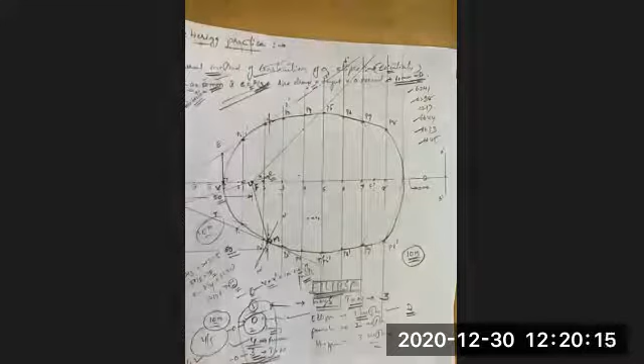So in last class, we discussed about ellipse. Any doubts in this regard? What probability I explained? I told that maximum probability is he may change the values. What values he can do? In last class, I taken focus to distance 50 mm, eccentricity 2 by 3, right? Now he may change, instead of 50, he may make it 60. Instead of 2 by 3, he will make 3 by 4.

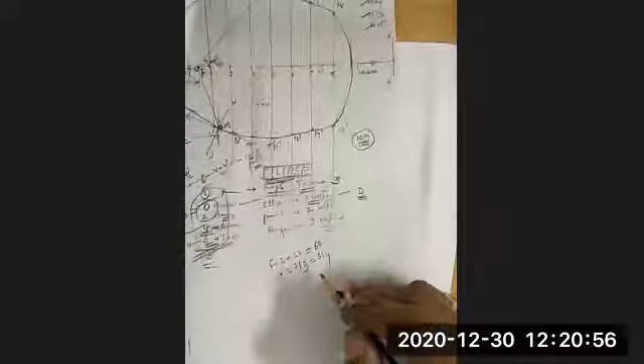Next. Only probability is he may change the value of focus and distance. So he can change any value. You can draw figures. That's why I told I will solve only one problem. If you want more practice, take 60, change eccentricity value, do it. You can make it 3 by 5. So there are so many probabilities. Only thing is that size is a matter. Principle will remain same. This is the one aspect with respect to nature of curve. Second, what I told, it is less than 1.

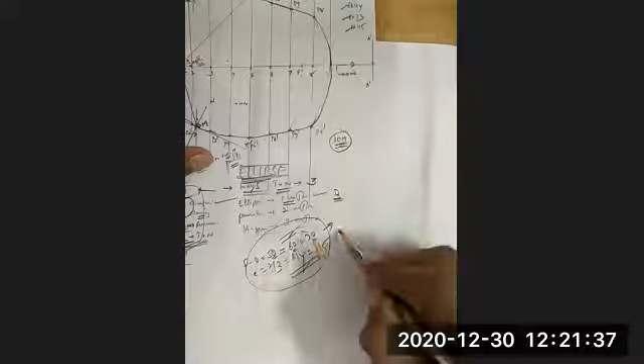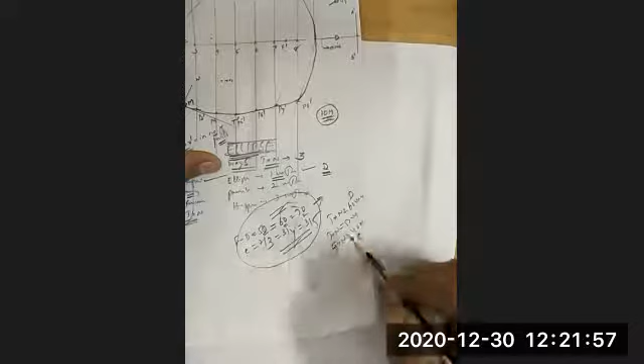See carefully. Next, he may ask tangent and normal. In first method, I asked some 60 mm. He may say that tangent and normal should be from directrix. I am talking with respect to directrix only. He may say 50 mm, he may say 40 mm, it may be 70 mm. So values may change, but the procedure which we adopted will remain same. Procedure does not change. Any doubts? Drawing tangent and normal, you say again? Yeah.

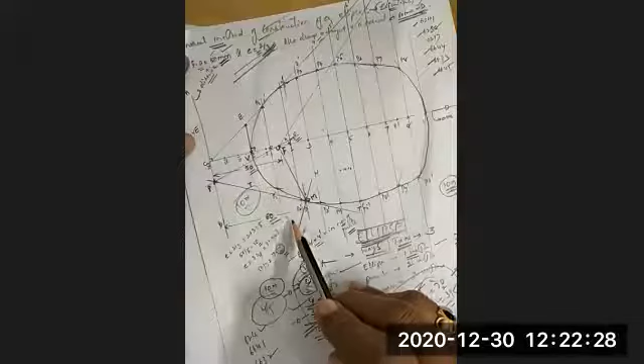In directrix method, I simply told directrix is a fixed line. From fixed line, as per given condition, it is 60 mm. I drawn one more parallel line at 60. That line I extended in such a way that it has to cut the arc. And that is cutting arc in two positions, up as well as down, because it is a mirror image. So I preferred bottom. Wherever it cuts, I taken M, the point at a distance of 60 mm from directrix. After that, I joined that point with focus.

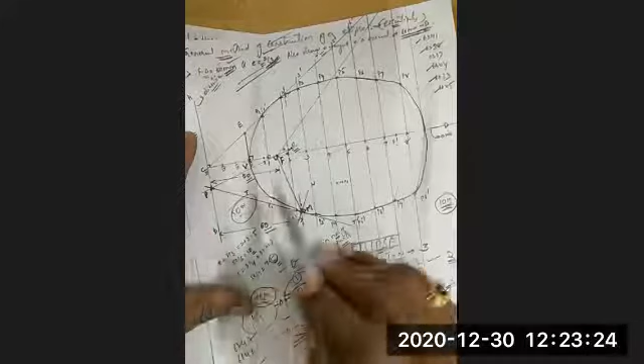Now with respect to this line, I want to draw one perpendicular line. It is inclined line. Perpendicular means the relation between this line and this line should be 90 degree. That line should be perpendicular to MF, passing through F, but it has to cut the directrix line. Wherever it cuts, I will say that as P. And that P I will join with M, it acts as a tangent. That's why I named T, T dash.

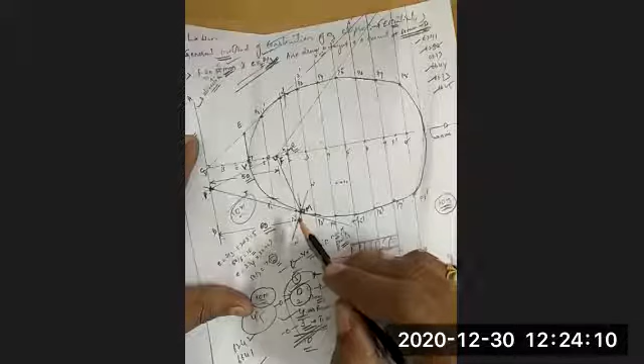Then I know the relation between tangent and normal. Perpendicular to the tangent is normal. I will keep my protractor or mini drafter parallel to this line. One side, other is perpendicular, 90 degree. That N should be passing through M because we are finding tangent and normal passing through the point M.

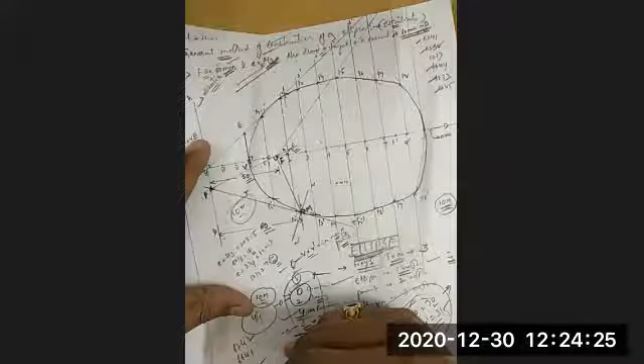That you have to keep in mind. So passing through that, I will draw a perpendicular, that is the normal. Any doubts? Sir, that F to P I am not getting, sir. F to P, Amma? Which line are you not getting? F to P, that normal, how are you taking 90 degrees, sir? Amma, keep your mini drafter. You don't have a mini drafter. Okay. You keep your protractor.

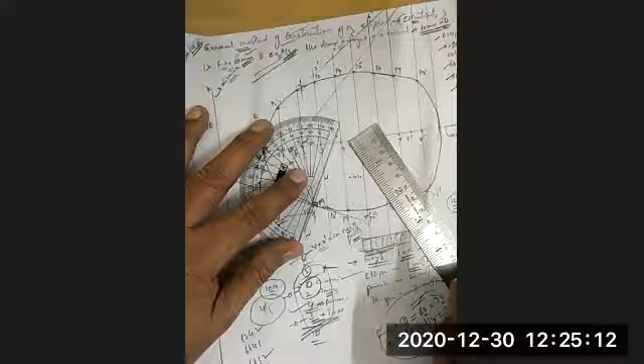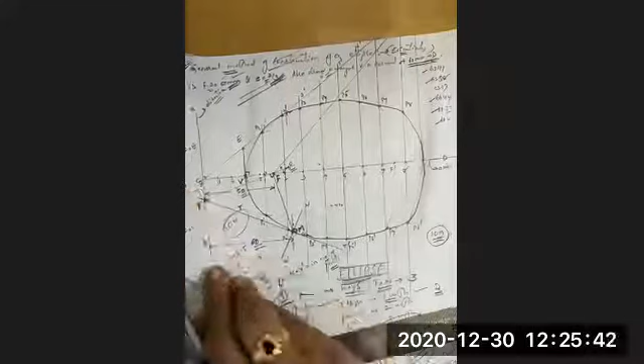So this perpendicular, what is that? This is the geometrical rule, Amma. Not that line, sir. Up, sir. F to P. From F you drew one line, sir. F to P. Again, you do one thing. You have a scale. This is the scale, can you see? Yes, sir. Now you see this one line. Observe carefully. This one line is visible. This line. Yes, sir.

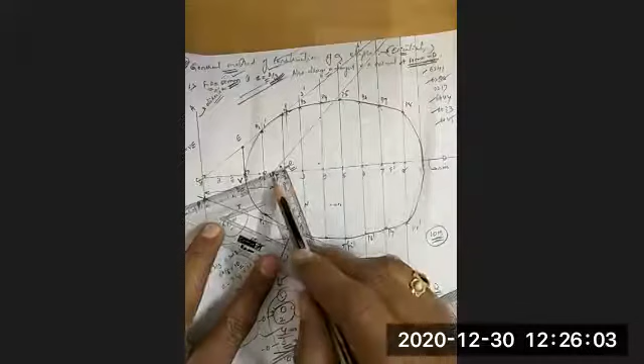I kept one parallel to the MF line. Where did I keep it? Parallel to. If this line is parallel, this side, because I know that this side and this side are perpendicular, these lines are drawn. I kept one small element of the one line parallel to MF line at F. Then I drew this. See, this is perpendicular, Amma, this is the rule. Because the relation between this vertical line and this horizontal line is how much? Right angle. 90 degree, perpendicular. Right angle means 90. Otherwise, if you are getting confused, you keep it like this.

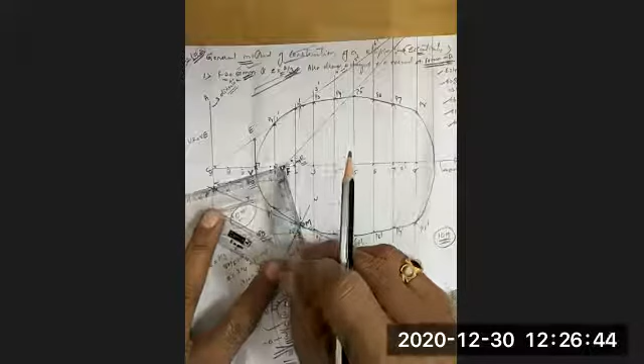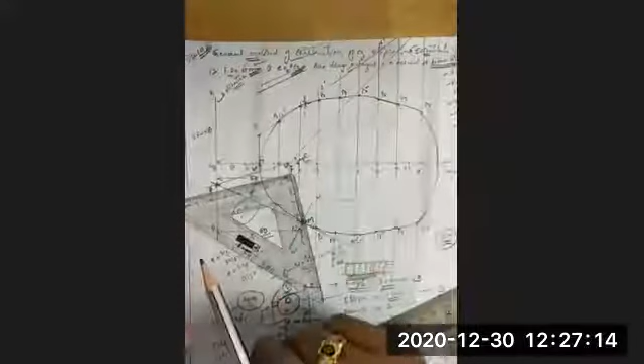So I can draw this line, I can extend it. So that is a relation of 90. You are not observing my tools, the position of tools. Why we are insisting on these many things means you are not using a mini drafter. If you use a mini drafter, these many problems cannot arise. Mini drafter is a tool. That's why I told it is a machine. That machine helps us to maintain parallel and perpendicular lines. But whenever we want, we use the protractor method, or by using this scale, we assume this scale as parallel to this line and obviously it is perpendicular. Got it?

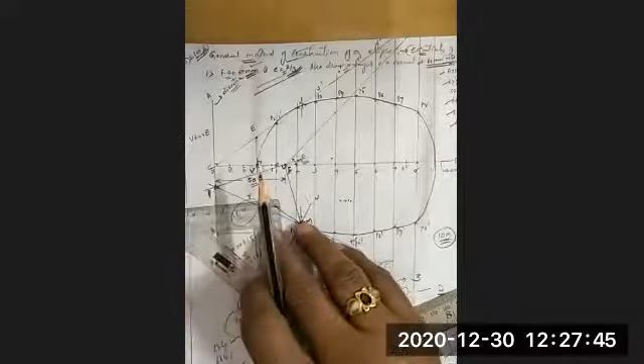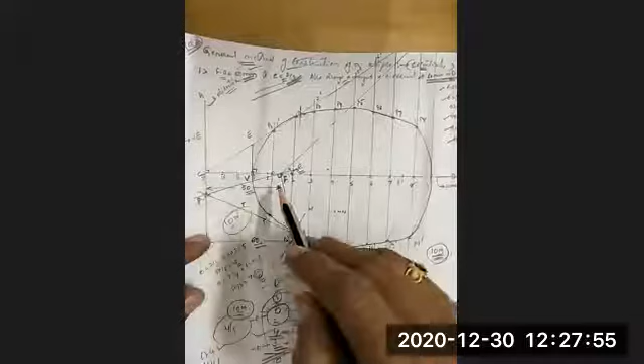Yes sir, no? Yes, sir. Shall we go for the next problem? Sir, I have a doubt. How did we draw that line? We are not getting it. FM line, sir. FM is not a problem. M we located as per the given condition, 60 mm. How did I locate it? I measured 60 from the directrix. This AB line is the directrix. I measured 60. You see, I will start. 10, 20.

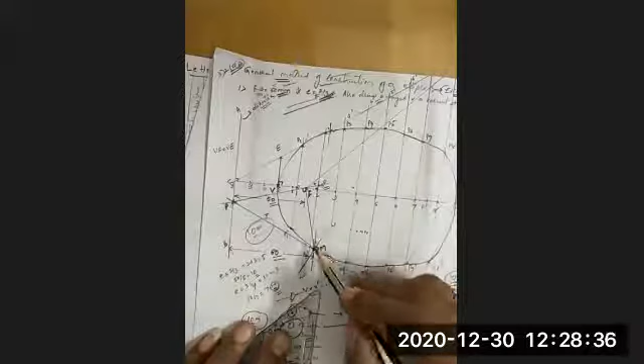That line I drew in such a way that it has to cut the arc. I drew a very big line, so it has to cut the arc. That point M is on the arc. Always we are finding tangent and normal. Read that question. Draw a tangent and a normal at a point M on the curve at a distance of 60 mm from the directrix. Look at this carefully. Any doubts? No, sir.

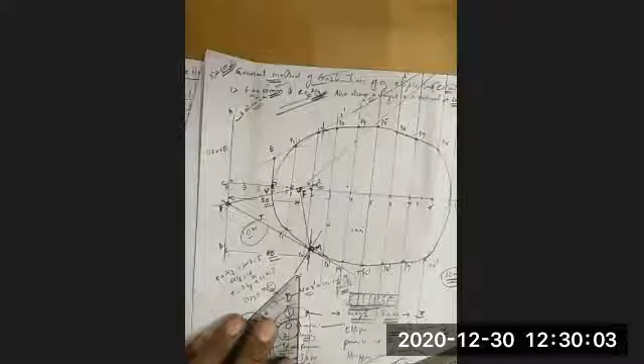I am talking to you people. Now audible? Now it is audible, sir. Yeah, right. So finish. No doubts. Shall I move to the next problem? Yes, sir. Right. Take next topic.

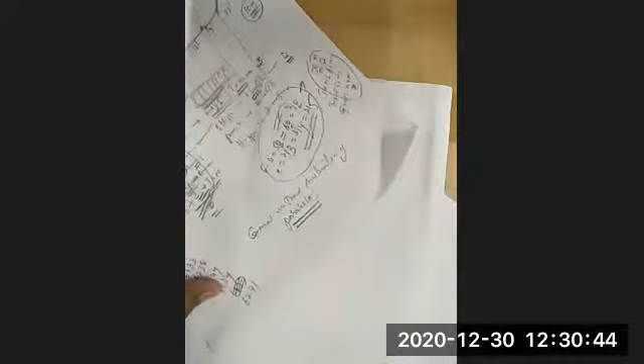General method of construction of a hyperbola. General method of construction of a parabola, not hyperbola, parabola. Write down. Next item: general method of construction of a parabola. Noted down? Take one problem. Draw a curve, comma.

The distance between focus and directrix is 60 mm. Finish. Now, what is the question? What did you note down? Draw a curve. I am not naming the curve. In the title I told parabola, but in the problem I am nowhere claiming it is a parabola or hyperbola, right? Draw a curve when the distance between focus and directrix is 60 mm. Name the curve.

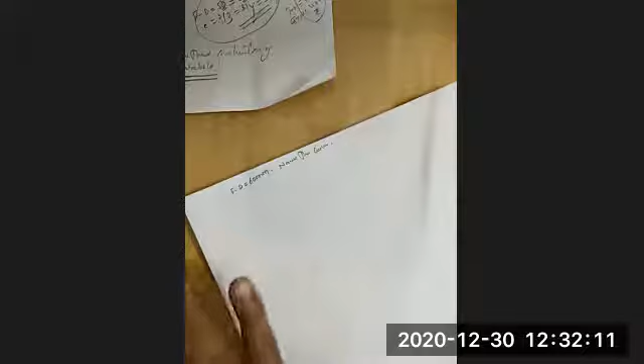Then full stop. So finish. This is the given information for the curve. Also draw a tangent and a normal at a point on the curve 55 mm from the focus. You are getting my point? Where is it located now? 55 mm from the focus. Also draw a tangent and a normal at a point on the curve 55 mm from the focus.

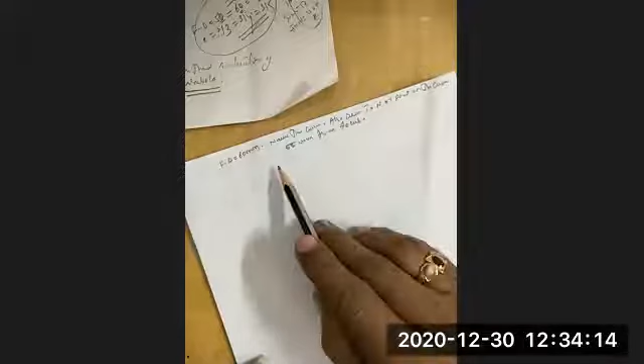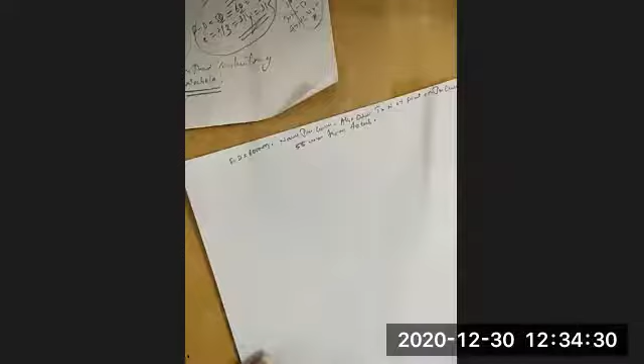Now am I audible? Yes, sir. Noted down the full problem? Noted down. Yes, sir. Draw a tangent and a normal at a point on the curve 55 mm from the focus. My question is, which curve do you have to draw? Parabola, sir. Why? It does not give eccentricity, sir. In the problem he has not given eccentricity. Then how will you know?

In the earlier method, for ellipse and hyperbola, he will give eccentricity. For parabola, eccentricity is 1. Yes, sir. Eccentricity equal to 1. Listen now. That is the intelligence. In parabola, he won't give the eccentricity value. Don't anticipate. If you anticipate, you are doing a blunder mistake. He only tells the distance between focus and directrix. By using that, we have to construct.

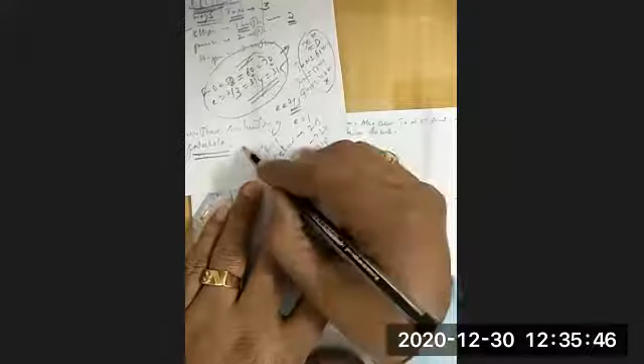Listen carefully now. Same procedure. It is a simple figure because parabola is an open loop. It does not have a closed loop. Only ellipse is a closed loop, and due to that, it has two directrices, two vertices, and two foci. But parabola has one focus, one directrix, one vertex. Parabola and hyperbola follow the same methodology. Getting my point? So be careful regarding these two. Now we will start the same procedure.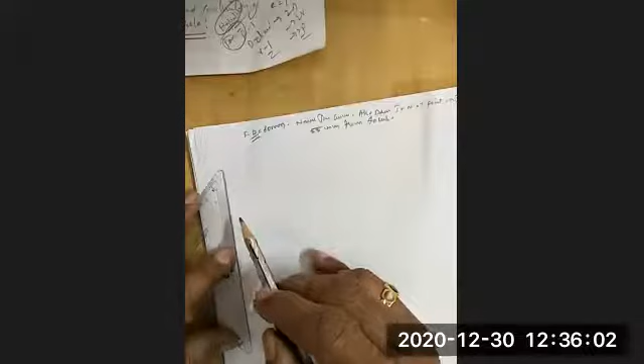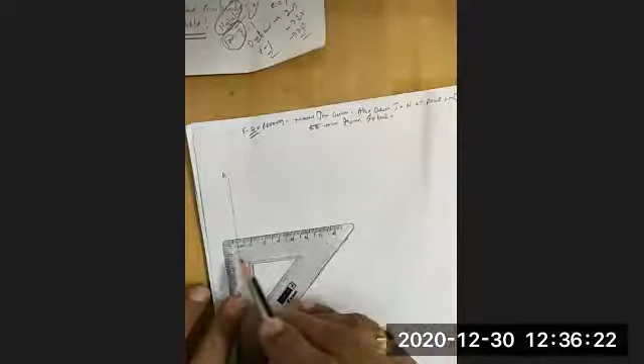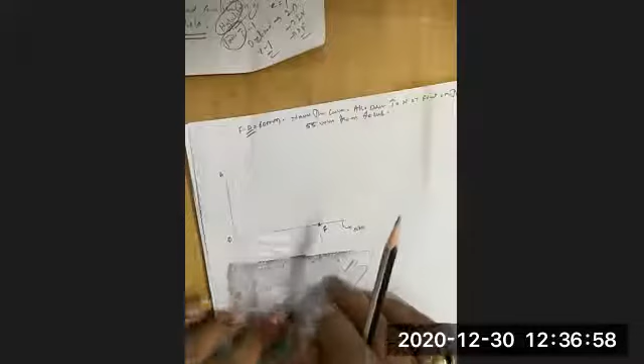I will draw one vertical line. First, the directrix line AB. Then draw a perpendicular to it. I kept one line parallel to AB, then obviously it is perpendicular. This is C, and this is the axis line. Any doubt? How much is given? 60, sir. Focus to directrix is 60. I will take 10, 20, 30, 40, 50, 60. This is the location of the focus. 60 mm. This is a must, 1 mark. You have to write the dimensions very systematically.

Now 60 mm. Now tell me, where is the position of the vertex? Sir, at C. Wrong. In the earlier method, we divided and kept the vertex 2 units from focus and 3 units from directrix, because eccentricity was 2/3. But here eccentricity is a missing element. Then how to get the eccentricity value? Anyone?

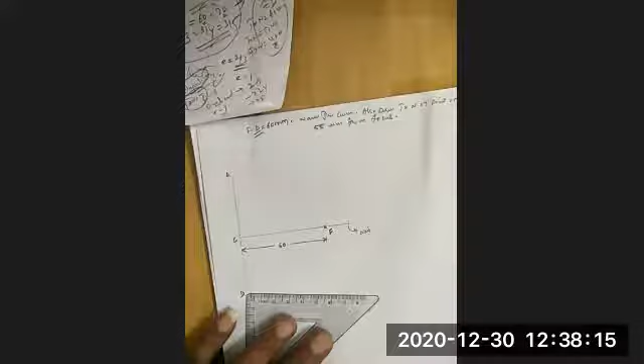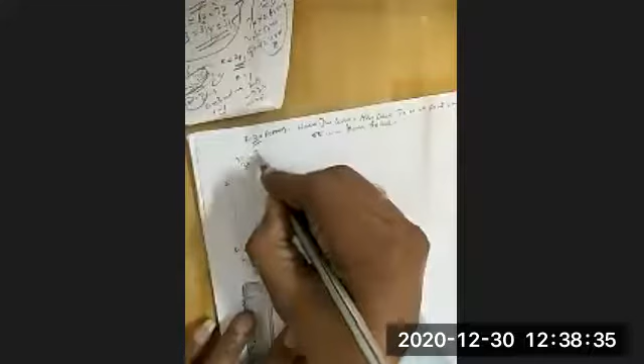Sir, the midpoint of C and F. How much? Very good. Why not 1 by 1? The midpoint of this line is the vertex position. Now you see, I divided this into 2 units, 30 and 30. 30 by 30 is equal to 1. Getting my point? The vertex is the midpoint between C and F. Any doubts?

Any doubts? No, sir. Understand. So that's why for parabola, he won't give eccentricity value, because it is the midpoint. If instead of 60 he gives 70, then 35, right? Instead of that, 50, 25, 20, whatever it may be, the midpoint of CF is the position of

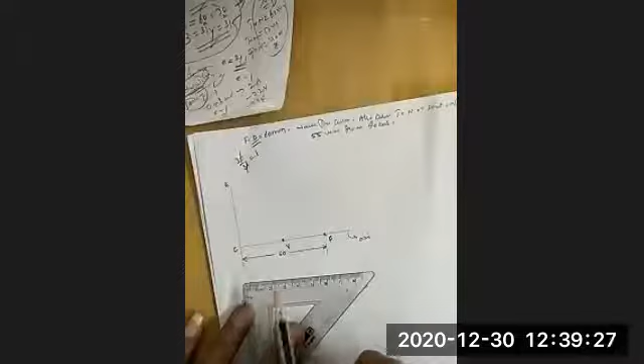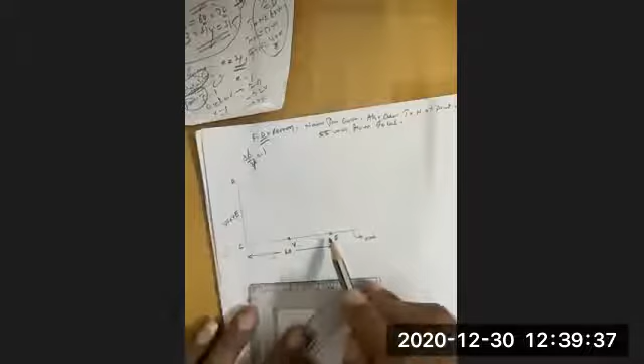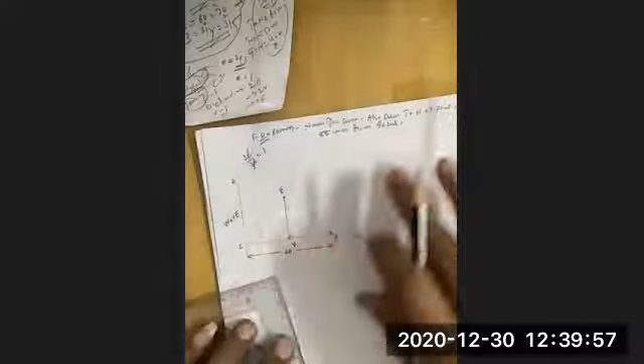vertex. Now listen, VF is equal to VE, same procedure. VF, how much is it already? 30. Draw perpendicularly 30. This is the position of E. Now join C and E. Same procedure we carried out until now. I will extend. Getting my point? Again, I draw a very big line.

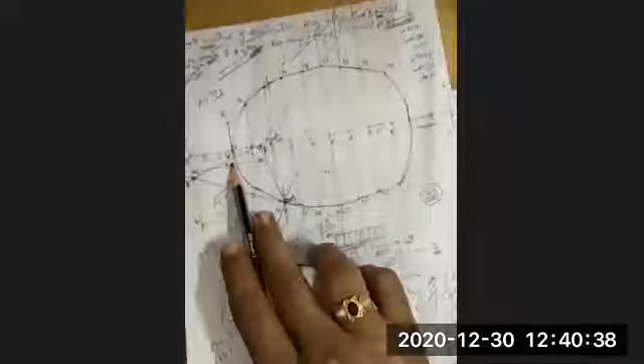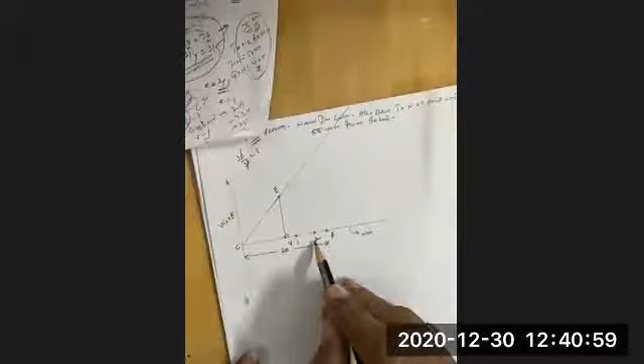Now extend this line. After this, now you see one focus, one vertex, one directrix. Enough, my requirement of parabola is over. In ellipse, I divided V and V dash, the two vertices, into an equal number of parts. But here it is not required, because there is no second vertex. I will take 2 points randomly in between vertex and focus, 2 points after focus. You may take a fifth also, there is no restriction. So 3 to 4, maximum 5 points.

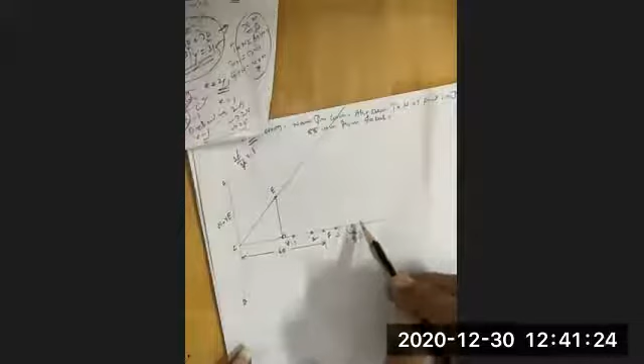2 in between vertex and focus randomly, because we are not dividing equally, we are just marking the points. And then 3 and 4. What procedure I will follow? Same. From 1, draw a perpendicular up as well as down. Wherever it cuts, 1 dash.

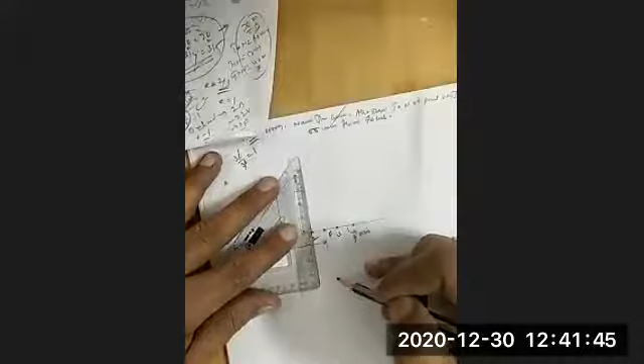From 2, hello, shh. Don't make noise. I'm not talking to you, Amma. Here some people are making noise. Don't worry about you people, right?

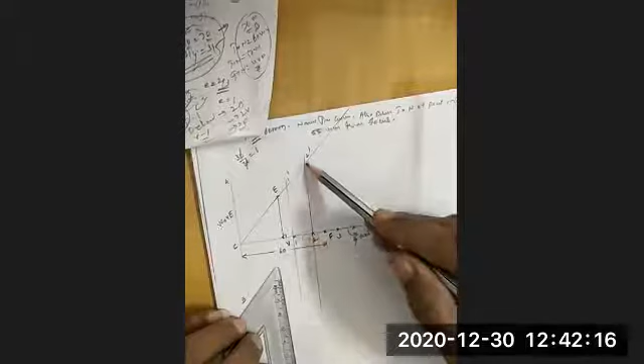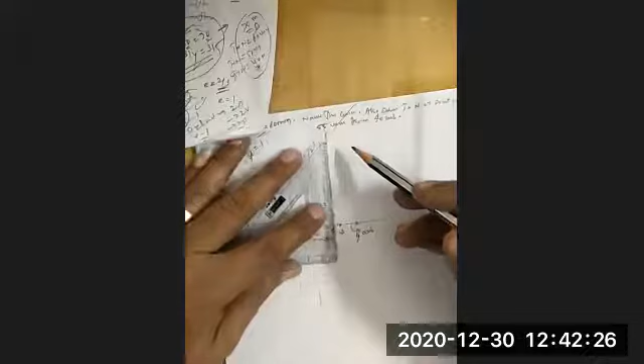Sir, should the length be equal or different, up and down? Which length? This one, 1 dash, is cutting the same length, can we extend it? Yes, 2 dash, because it is a mirror image. Upper image, lower image, mirror means the same replica. So that's why I'm extending. It may be a little bit up and down, but it is able to represent it. Third point, fourth point. Now this is 3 dash and this is 4 dash.

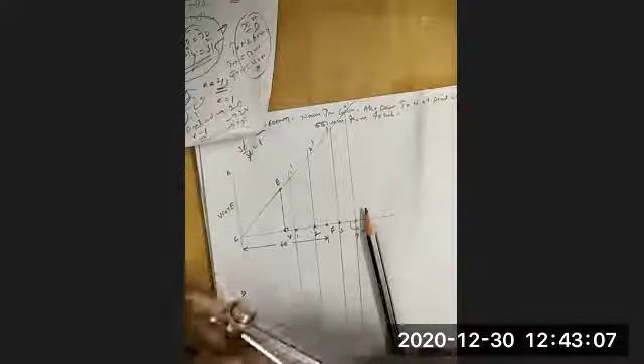We know parabola is an open loop, so we took 2 points after vertex in between focus, and 2 points after focus. Take the same procedure, same methodology; only thing is how to define the vertex. Take 1 dash as a radius, F as a center. Center should not change. Up, down. Cut one line.

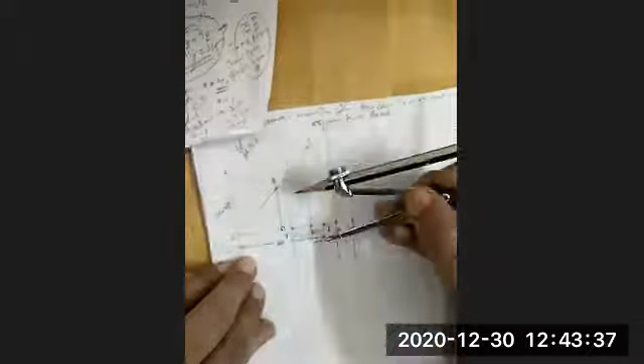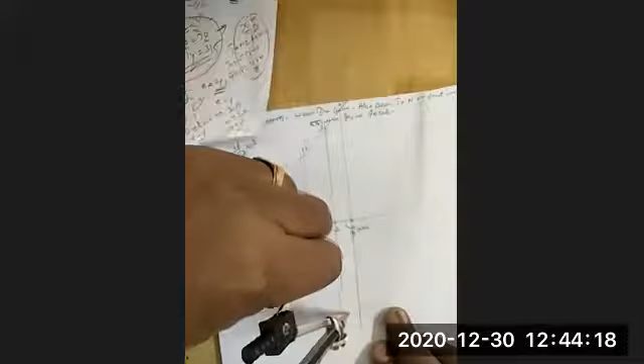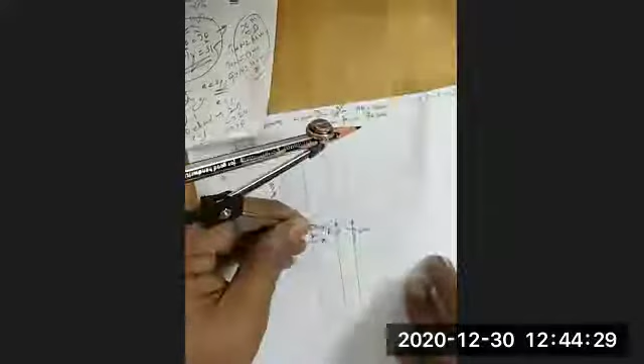2 dash as a radius, F as a center, cut 2 line. That's why I drew the line up, so it should be cut. Next, 3 dash as radius, F as center. Center should not change, Amma. Cut 3 line. 4 dash as radius, F as center. Cut 4th line.

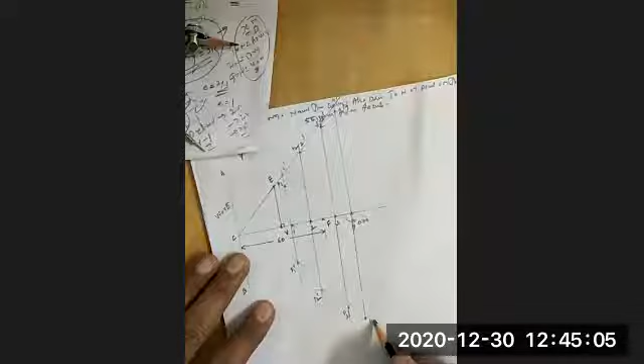Now mark. This one is P1, obviously P1 dash. P2, P2 dash. P3, P3 dash. P4, P4 dash. So we marked the points. Same procedure: once we know the position of vertex, we took VF equal to VE, joined CE and extended the CE line. Then we divided points from the vertex: 2 in between focus and vertex, 2 after that. Now join with a very smooth curve.

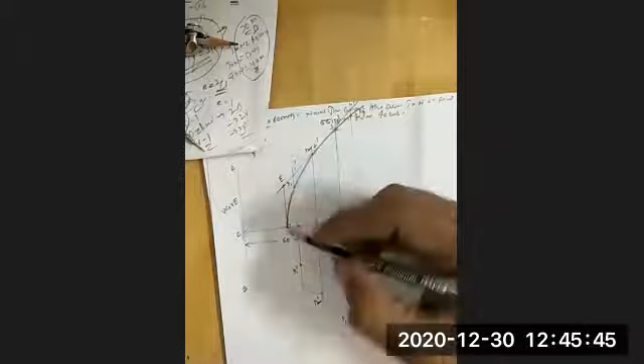Who is that? Who is that? Otherwise, I will mute all of you. Don't misuse it. You will get a number of doubts while I'm explaining the concept.

See, parabola finished. Construction of parabola is almost 50% simpler than ellipse. Any doubts? No, sir. Got it? You can do it. Yes, sir. Shall I finish tangent and normal, or after that? Sir, finish it. Okay, listen carefully.

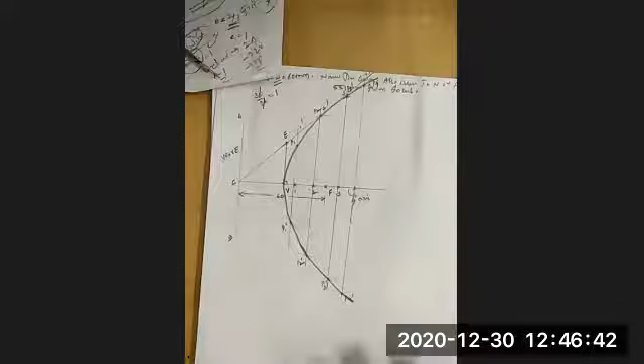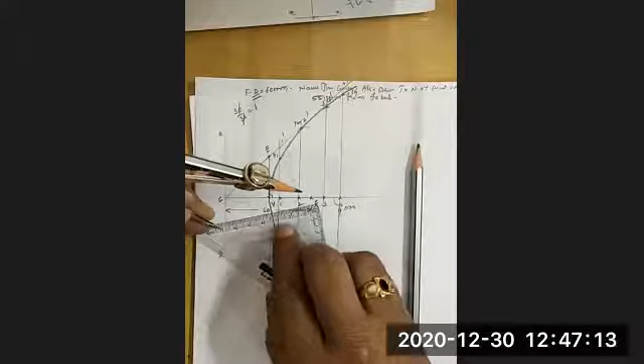In the first method, I targeted the directrix. Tangent and normal can be done 3 ways. The first way is with respect to directrix, the second way is with respect to focus. How much is given? 55, sir. Measure 55 on your compass. I take 7 as 0: 10, 20, 30, 40, 50, 55.

From focus there are 2 possibilities: you may cut the curve on the upper side or towards the bottom side. So I cut 55 mm away from focus. This is the point. Any doubts? No, sir. So now I measured the M point.

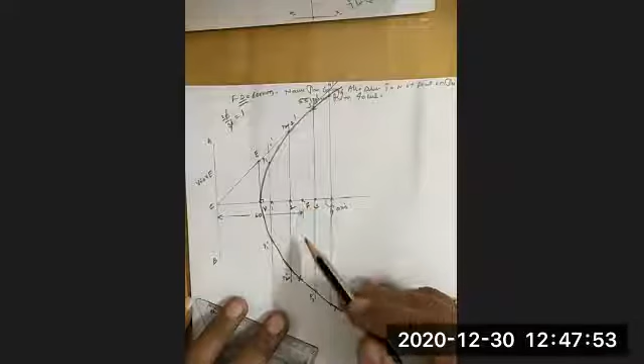Now I will call this as M. That is important nomenclature I will prefer. So from focus it is 55. There are two probabilities, but I preferred the bottom probability. I marked, means only marking the point is from directrix or from focus.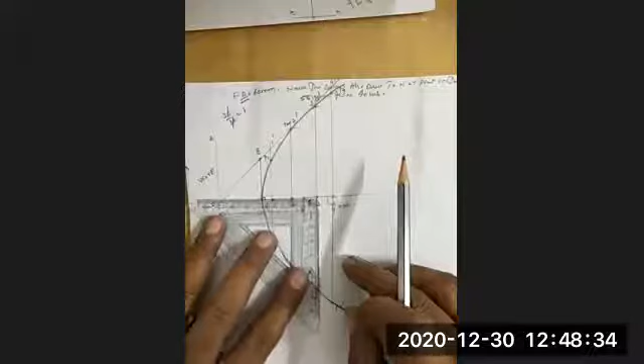Only one is, we can measure from directrix or we can measure from focus. Shall I proceed? See, same procedure. Yes, sir. Join M and F. Same procedure. After this, keep perpendicular to MF. Draw the line passing through focus. It should cut the directrix.

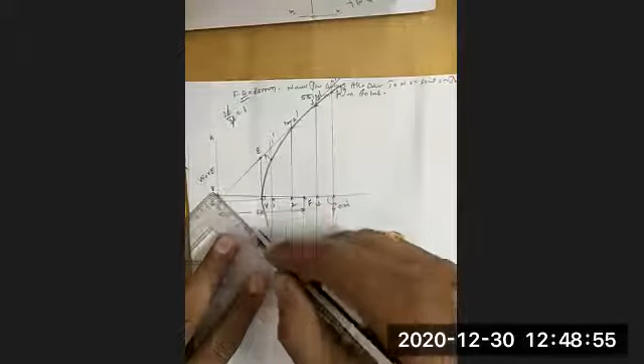It is cutting directrix here. Mark that point as P. Join P and M. Same procedure. That line passing through M acts as a tangent, T dash. Normal to tangent. You see, this is perpendicular. This is N dash. Relation is 90 degrees. Very simple method. But tangent and normal carry 3 marks. What I am telling, be careful regarding that.

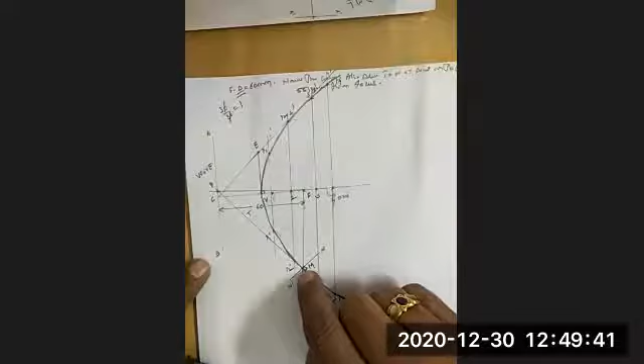Any doubts? Marked point M with respect to focus. I take a compass, 55 mm, cut bottom as well as up. But I want to construct the tangent at the bottom. I marked that as M, the point which cuts the curve, and that point I joined with focus. And with respect to MF line, I drew a perpendicular. That line has to cut the directrix.

I marked it as P, joined PM. That acts as a tangent passing through M. And at M, perpendicular to T dash line is N dash. It is normal.

I will take attendance. Any doubts? You may. Sir, one doubt, sir. No, sir. Okay, very good. Doubt kanpadali. Wait for a while. Cheppamma, em doubts undi cheppu.

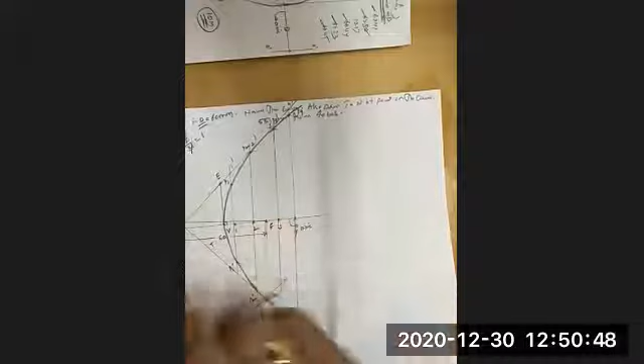Sir, after taking 55 mm on compass, you tell total, sir. This is the value I taken, 55. I kept what he told. What he told? He told that the point is 55 mm from focus. F is the focus point. I kept focus. I cut the arc of 55 mm up, 55 mm down.

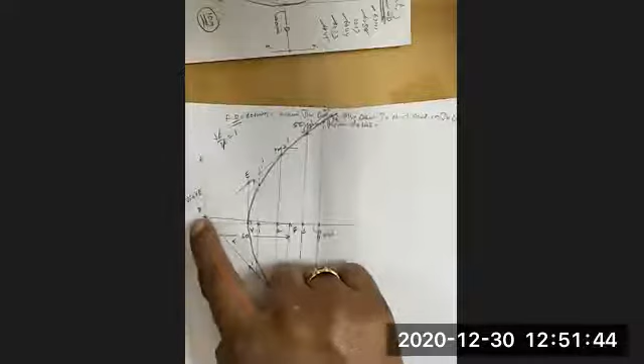Once I joined, I drew a perpendicular to MF, 90 degree. That line passing through focus, cut for directrix. Wherever it cut directrix, that point I joined with M. It acts as a tangent. This is the tangent line. Tangent means it will touch at one particular point partially with the circular object. This is a circular object. So it will touch partially. So that is a tangent.

Perpendicular to tangent is normal. Once you got tangent, draw a perpendicular passing through M. Sir, say slowly, sir. Yes, Amma? Hello? Say slowly, sir. You're going very fast.

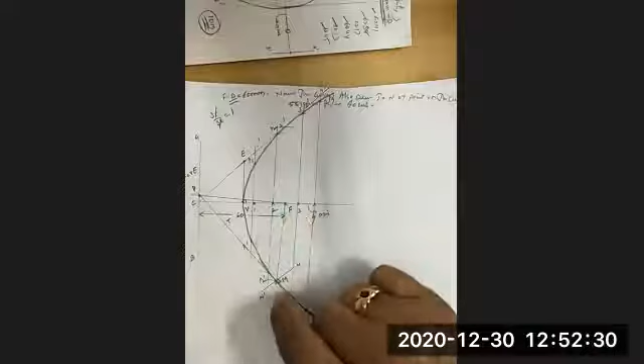Okay. First, taking F as a center point, 55 mm as a radius, I will mark the point on the curve up as well as down. There are two probabilities to draw the curve. One up, another down. I prefer down. Then what I did, I marked that point as M, joined M with F, MF.

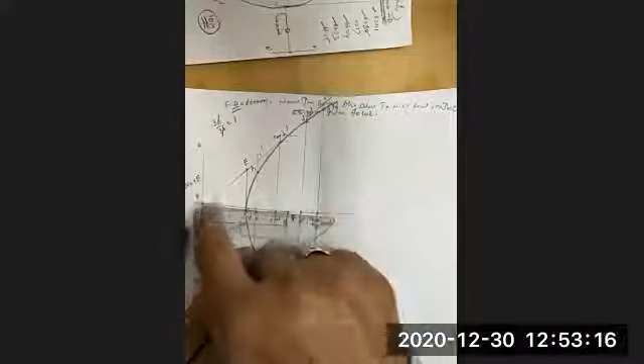Then I kept a mini drafter or any 90-degree set square, 45 degree set square. I kept one edge of this parallel to the MF line. Passing through focus, I drew, because I know this is perpendicular. So I drew that line at 90 degrees in such a way that it passes through focus, but simultaneously it has to cut the directrix line. So it is cutting the directrix line at P.

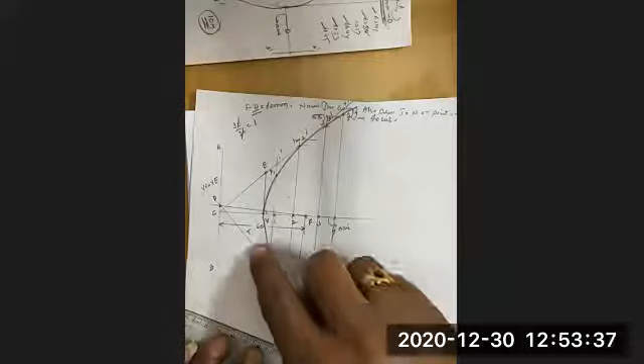That P I joined with M, that line extended, it acts as a tangent. After that, I kept my set square again. One of the edges is parallel to the T dash line. This line. Perpendicular to that I drew, meaning the relation between this and this. Chudandamma, ee line 90-degree amma. So I know that relation: this 45-degree set square, the angle between this side and this side is how much? 90 degrees. That's why I used this tool.

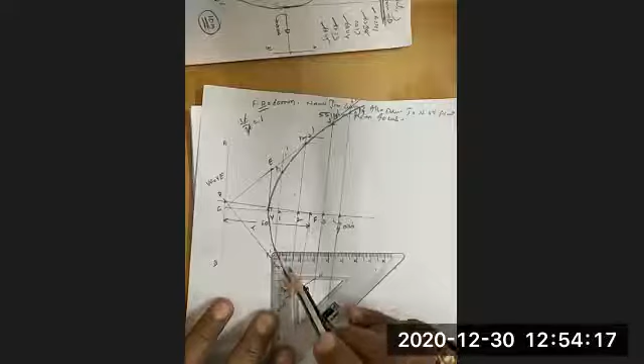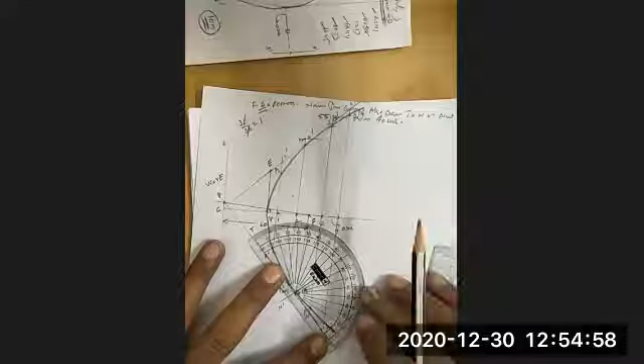I have one more also, for your kind information. I did not use this. This is also 90. You can use any tool; it is the relation between two sides. Sir, use protractor and draw once, sir. Okay, take the protractor. Keep the protractor center point on M. This is M. Right. M point, and it is parallel to the T dash line.